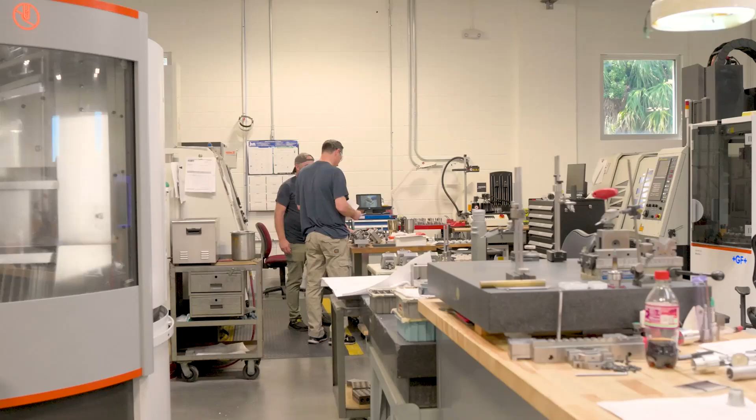Today I'm here in St. Petersburg, Florida. I'm going to be touring the SyBridge Technologies manufacturing facility. It's all mold and die, and Dave is going to be talking to us about how they utilize Mastercam to make these intricate molds and dies.

Hey Dave. Hey Jesse, welcome to SyBridge. Yeah, this is an impressive facility here. Thank you.

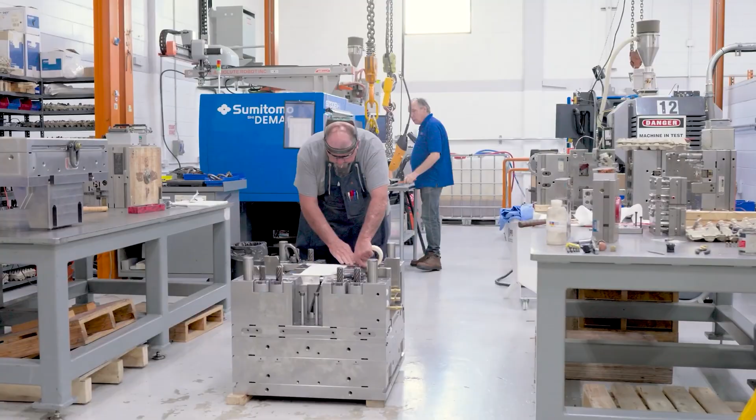I can't help but notice what's sitting behind here. I'm guessing this is kind of what you guys produce here. Yeah, this is pretty much the end product for us. These are molds that are assembled. All mold assembly happens over here. Yep. All the components come in from all around the shop. Once the molds are assembled here, we have presses here to test the molds, to sample. Or if it's a larger size mold, we have a molding facility that's a few hundred feet from here, where they can do that.

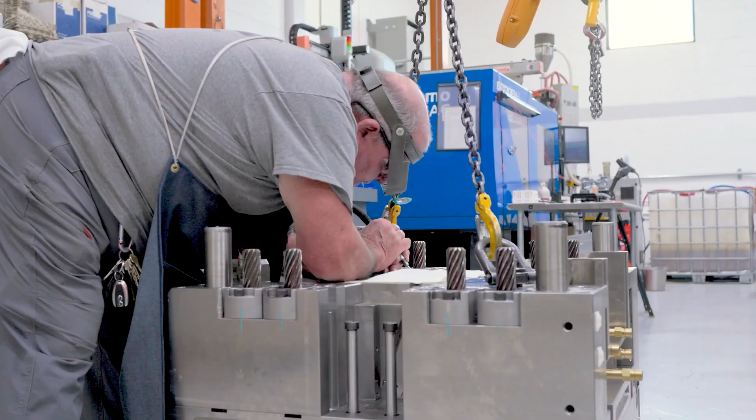So I know SyBridge Technologies, it's a big nationwide company. Here in St. Petersburg, you guys use Mastercam. I know it's used in other locations as well, but how do you use Mastercam here? We use it to program everything from a 3-axis mill to a 5-axis mill. We use it to program our CNC lathes. We're primarily a medical manufacturer here, and so a lot of our parts are round. Not every one, but a lot of them are round. We do some consumer products here as well.

So I know this isn't the only place here that you're using Mastercam. I'd like to take a tour through the facility and kind of see some of the other areas if you wouldn't mind. Absolutely, I can show you the departments that use Mastercam. All right, let's go take a look. All right.

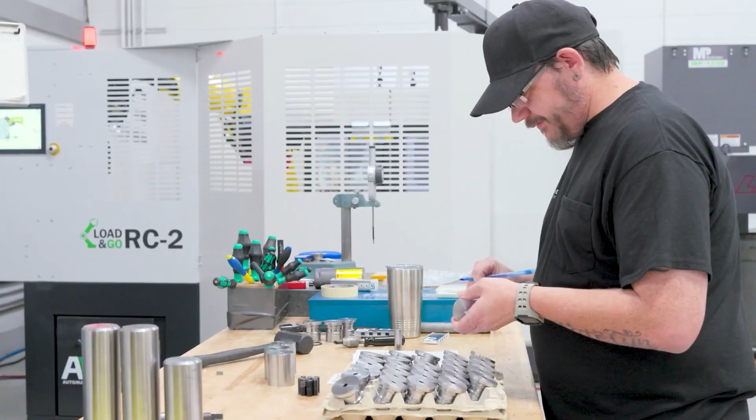Okay, Jesse, this is our lathe department right here. Got some automation back here too. We do. We've got a robot to change parts out so we can run unattended. We do everything from soft turning here to hard turning. Okay. So a lot of it, I'm assuming, has milling features as well. Yes. So you're kind of going back and forth there. Yeah, absolutely. A lot of times the part may start off turned soft in the lathe department. Then it might go to the milling or some other department before it goes to heat treat. Well, let's go check out those things.

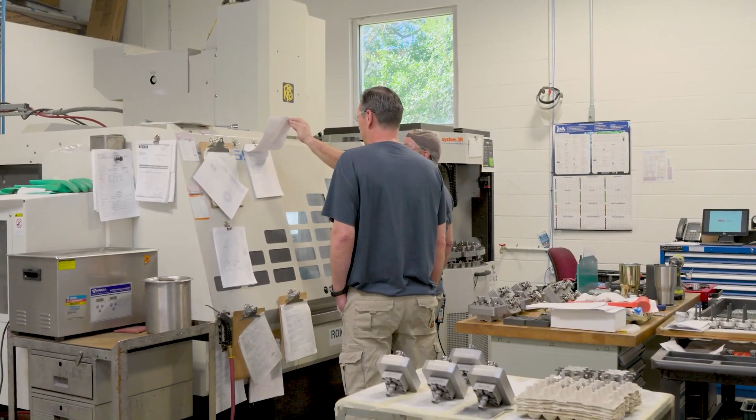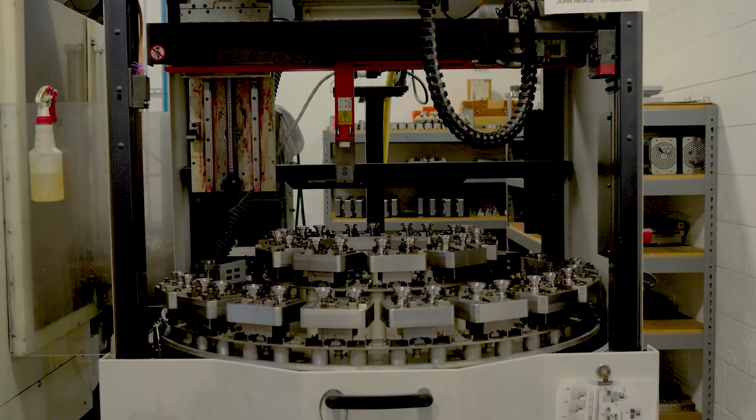Okay, sounds good. This is our hard milling and electrode department back here. We've got 3, 4, and 5-axis mills. Probably a lot of Mastercam utilization back here. Absolutely. Mastercam does a great job for us back here. This is one part we're machining right now. And we did that on our 5-axis Mikron. Mastercam did a wonderful job blending the top diameter with this tapered bottom diameter on this. Because of that tiny radius, I'm assuming you're using a very small tool. Yeah, it's probably less than a half a millimeter tool. So you've got to be in 5-axis because you can't get down there. Exactly. So you're in simultaneous 5. It's a really nice part.

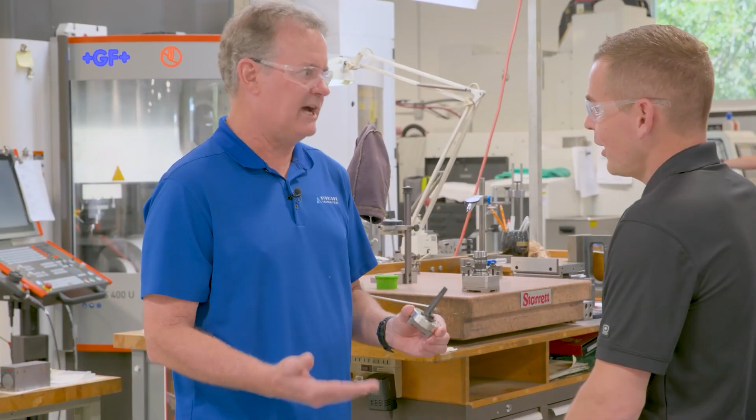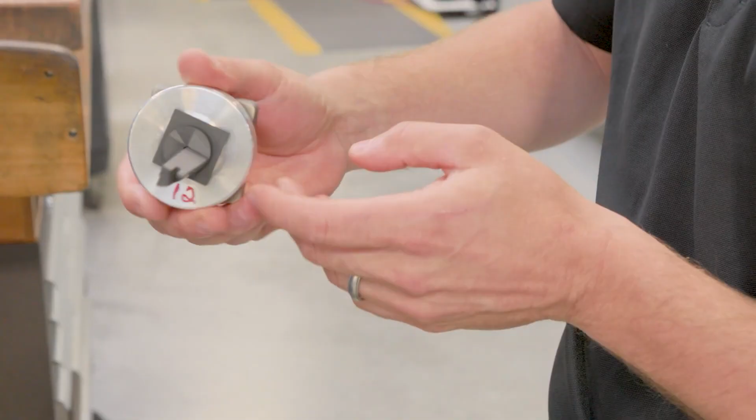And let me show you an electrode here. We hard mill everything first when we can, but there's certain times when that's not an option. Tough to make a square corner. Exactly. So we do cut electrodes back here. And that's one for a current job that we're... So is this done in 3-axis on the Roku here, or are you doing this in 5-axis? It's done in 3 or 4-axis on the Roku. Okay, nice. So you've got sinker EDM. Are you doing wire as well? Yeah, we do wire and sinker here. So where's your EDM department? In another building? No, it's right around the corner. Let me show you. Yeah, I'd like to see it.

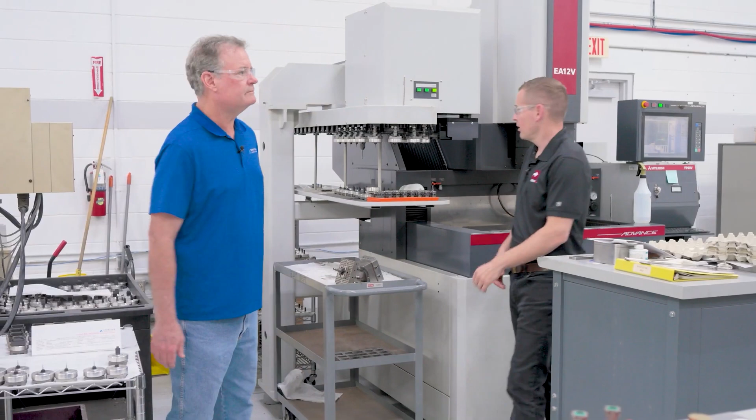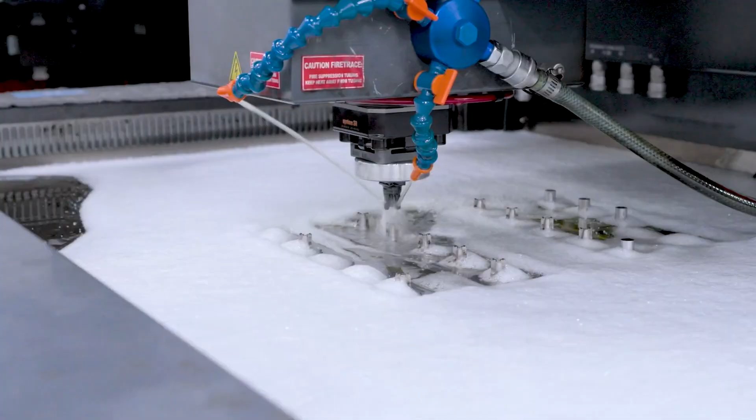So it looks like we've got one of your sinkers doing a change right here. Absolutely. These are where the electrodes are used over here in the sinker EDM. Yep. So these were all Mastercam machined electrodes. Yes. They're very dainty and very detailed. Absolutely. These particular electrodes are about 25 thousandths diameter at the tip. Yep. And we make some of them that go down to 8-10 thousandths diameter at the tip. Wow. So yeah, you just have to approach it in a certain way.

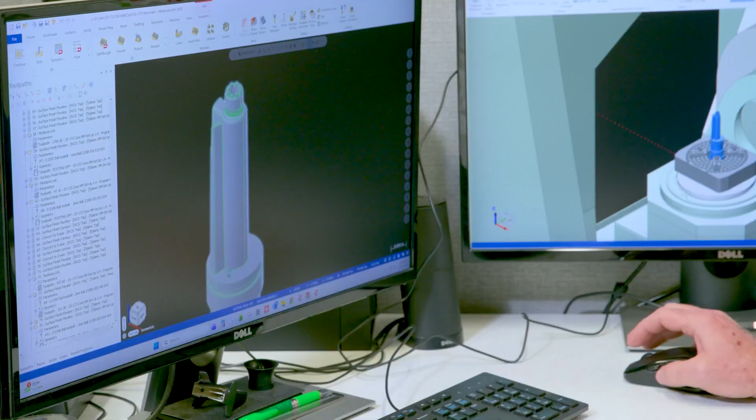Well, I want to see where the Mastercam magic happens. Could you take me to your desk? Absolutely. Walk this way. I see you've got, is that an electrode or is that a hard milling part you're doing? This is a hard milling part. It's a core that we've processed through soft mill, the lathes. Yep. Then it gets sent to heat treat, and we ended up finishing all of this part in our 5-axis Mikron. Nice.

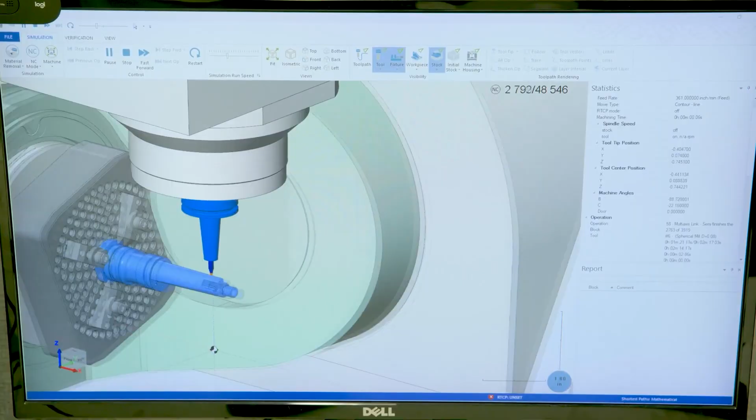There's some very delicate small features up here. What size radiuses are those? Those must be challenging. Yeah, they're 10 thou radius. Wow. And there's a tremendous amount of shutoffs on this part, so it has to be made extremely accurately and on location. I notice you're using a lot of convert to 5-axis there. You find that useful for the work that you're doing? It works great for every application that I need it.

For this one, I just needed a simple toolpath to machine something around the bottom in the 5-axis. So you can use a standard 3D toolpath and then convert that to 5-axis and get the results you need to tilt away. Yeah, I use surface finish contour, and then I converted it to 5-axis. Nice. Because these radiuses again are very small down here, and let's see, yeah, they're 10 thousandths as well. So it's really the only way we can get to them, other than if we were to burn it.

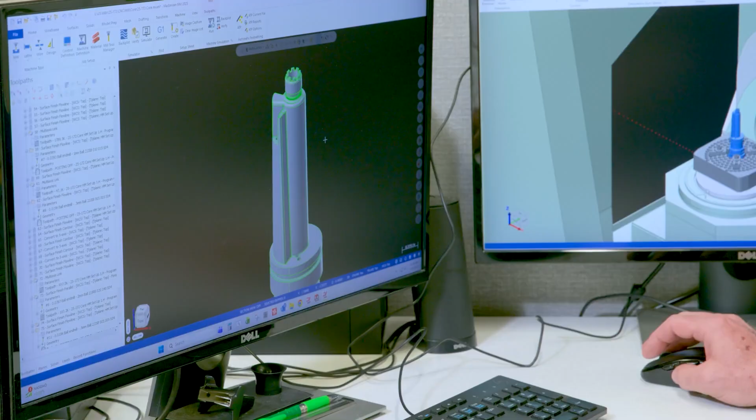Again, your length to diameter ratios on the parts you're making are very challenging in that regard. They are. But you're using multi-axis link. That's a great tool when you're on a 5-axis machine like that to link those parts together and make sure you've got safe motion. So I noticed you've got machine simulation up here too. I assume you use that a lot, and that probably helps your process out on the shop floor. It absolutely does. It gives us confidence that the program's going to run as expected without any collisions into the part. We use this machine simulation on our 5-axis soft mill and our Mikron hard mill. It's a big time saver. We don't have to do a lot of editing while the parts are in the machine waiting to be machined.

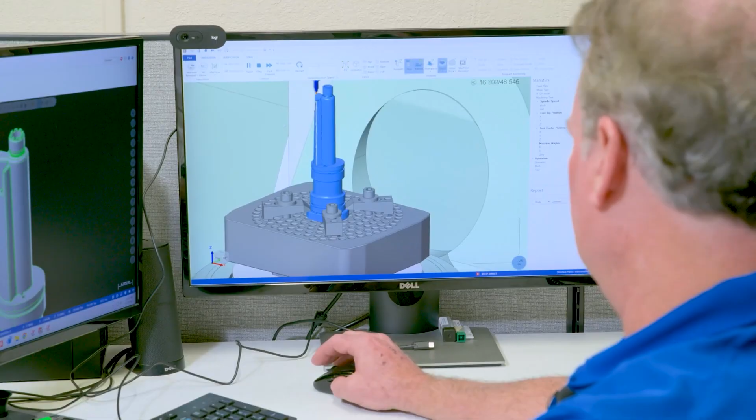And do you feel that shortens your development cycle? You know, being able to do these iterations in the office environment instead of in the shop environment? Absolutely. Our goal is to keep the spindles running here in this shop. So the more upfront engineering we can do, the better for our productivity.

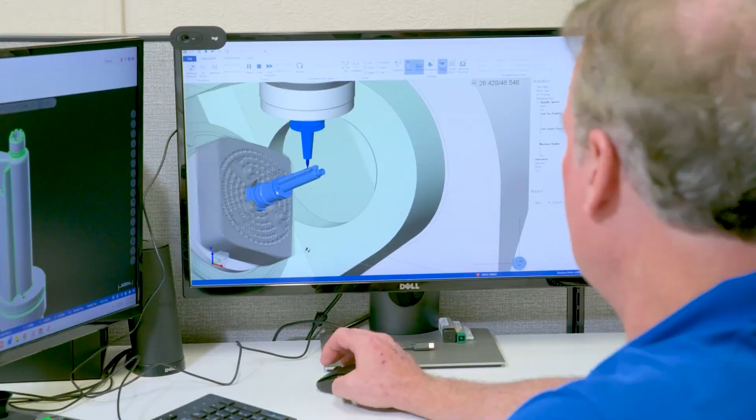Yeah. Well, really an impressive operation you've got here, Dave. Unfortunately, I've got to catch a flight and get out of here. I was wondering if you could walk me back out and I'll get signed out. Sounds great. That'd be great.

Dave, really incredible to see the facility you've got here, the products you're making, medical components. I never really thought about how this stuff was made, so just to see it, unbelievable.